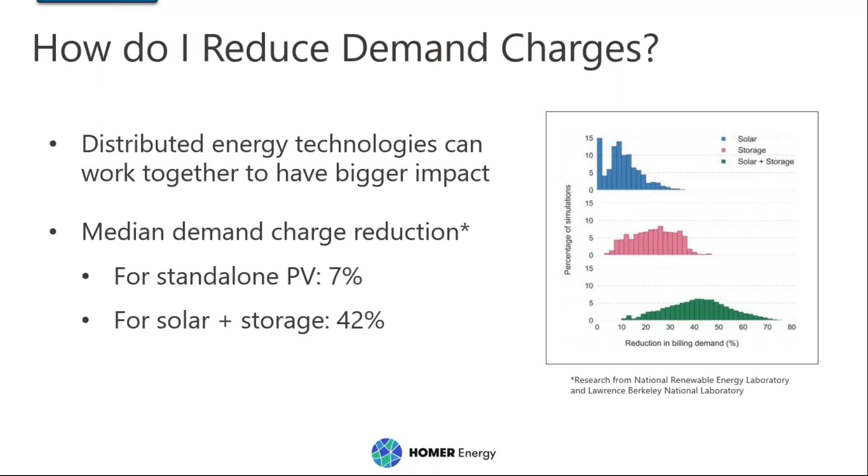Given that you need a mix of technologies to reliably reduce your utility bill, HOMER Grid will help you design this hybrid system, and that design process can be pretty complex. HOMER Grid will help you quickly evaluate any potential projects you're considering, and it's meant to facilitate this process and allow you to quickly model your utility bill and the hybrid system.

Each project is unique. The customer type and the load shape are critical to consider in this feasibility analysis. You're constantly considering the trade-offs and ultimately trying to answer questions like, how do you get the most out of your investment?

So we're bringing in HOMER Grid now. HOMER Grid is for modeling hybrid behind-the-meter systems where a reliable electricity network is connected. The software can quickly and accurately suggest the best size and technologies to reduce your utility bill through demand charge reduction, energy arbitrage, or PV arbitrage and self-consumption.

Using the philosophy that guides all of HOMER Energy's products, HOMER Grid determines the best mix of technologies and size to achieve the lowest cost solution. The technologies that HOMER Grid evaluates include solar PV, multiple chemistries for storage solutions, generators, and even combined heat and power technologies. HOMER Grid can help you understand the value and impact these technologies have in reducing your utility bill, and we try to make this process as easy and as quick as possible.

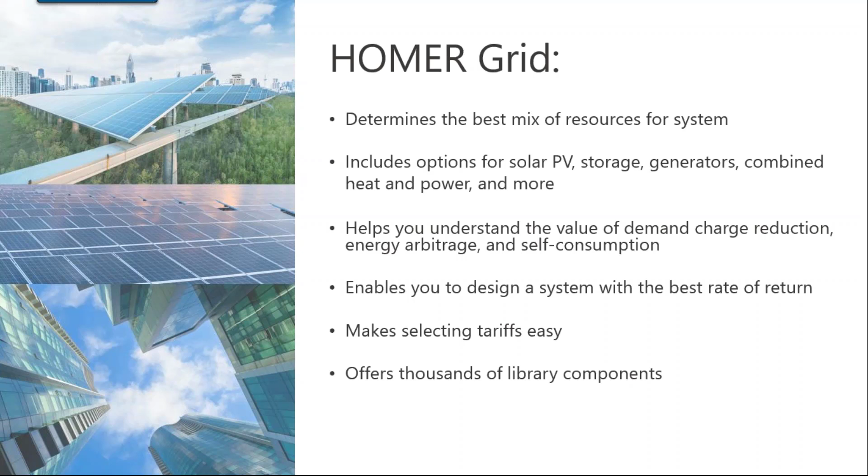If you want to compare utilities to one another, you can compare multiple tariffs. Likewise, you can compare specific components to each other and decide exactly which technology would have the lowest cost over the project lifetime. The library in HOMER Grid has thousands of components that can facilitate this exercise in evaluating trade-offs, so you can compare whether a lead acid battery would be cheaper than a lithium-ion battery.

How does all of this analysis happen? Well first, you have to start with your inputs, including where you're planning on building this project and what technologies you may be considering. Then you'll need to specify which tariff your facility is currently on and whether a different tariff might be possible, a reclassification as it's sometimes referred to.

If your project can utilize any incentives which would help the economics, you'll need to add that information. And of course, your facility's electrical needs, or the load profile, should be uploaded if at all possible. If you don't have your facility's load profile, we try to give you some starting point and examples. In the US, we've connected to the OpenEI database of load profiles, which you can use as a starting point. But of course, the more accurate your inputs, the better your results will be.

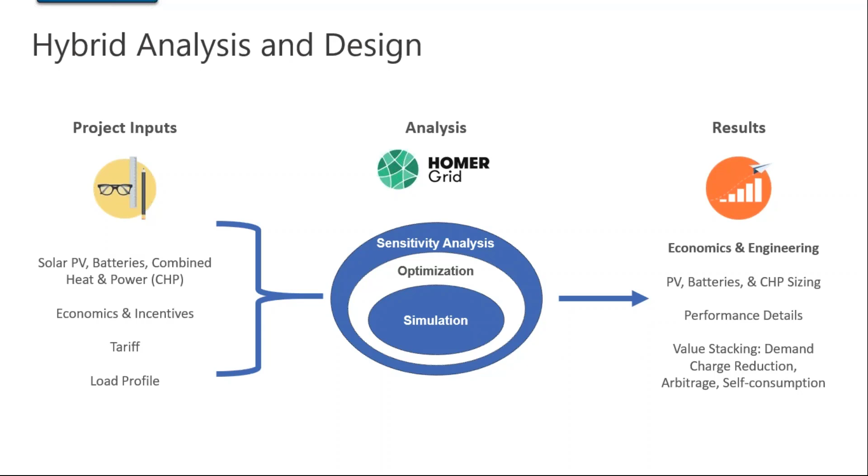HOMER Grid runs, depending on your inputs, hundreds to thousands of simulations and then ranks these simulations based on the lowest net present cost, and presents you ultimately with the economics and the engineering for your hybrid system. It sizes the system architecture, calculates performance details, and provides you with the financial information.

So I touched on many of the values that HOMER Grid has to offer, starting with demand charge reduction, the value stacking aspect of PV arbitrage and energy arbitrage. We pride ourselves in the robust storage model that HOMER Grid uses, which greatly outdoes the competition, and the powerful optimizer, which helps you find the right size for your hybrid technologies.

As far as the cutting edge dispatch strategy goes, our development team has come up with a perfect foresight methodology to make dispatch decisions, and I'll go through that in more detail during our demo. We're trying to facilitate this exercise and make it quick and easy for you, and to help you, we offer global resource data and integrate with the tariff database. Ultimately, the value of HOMER Grid is to get detailed, accurate, and completely customizable results where you can explore and quantify various risks associated with building your project.

And now I will jump into a HOMER Grid demo. Let's see. I'm going to talk about an example of an office building in downtown Sydney, which has both an electric load and a thermal load.

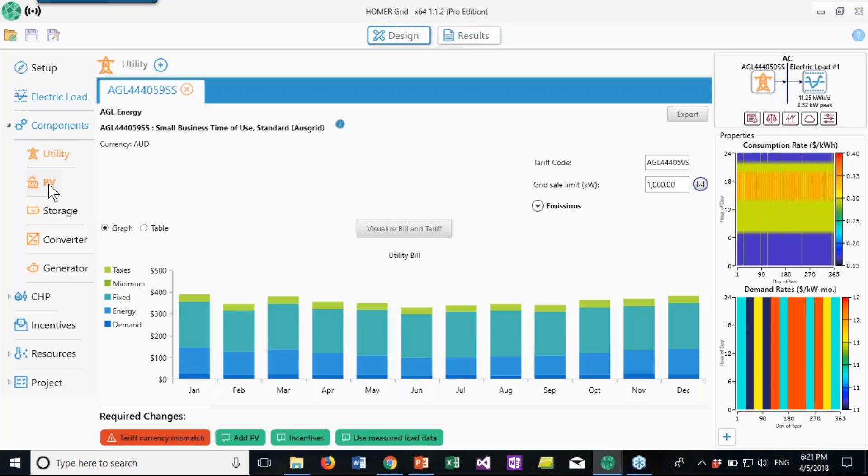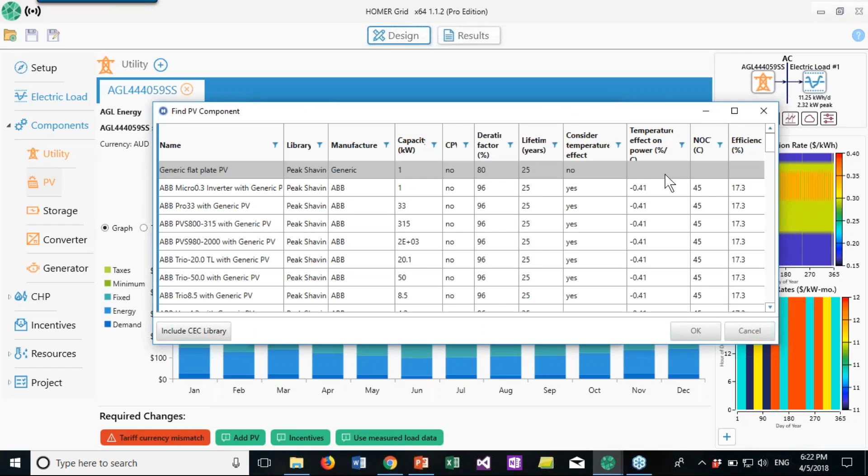We'll do PV. There's two ways to choose your PV system: you can choose from this drop-down menu here, or you can choose from this complete catalog menu, which has thousands of different PV modules. Today we're going to do just the generic flat plate PV.

And you'll notice that I'm faced with a lot of numbers here. If you don't know what they are, that's okay.

HOMER Grid and HOMER Pro, for that matter, are both economic models, and therefore they can consider, if you want to, economies of scale. So it allows you to say that smaller size installations, say residential PV, has a price of approximately $3 a watt, and utility scale PV drops down to below $2 a watt. And so it allows you to make the trade-offs more easily.

If you just have a price for your PV system which you know, of course you can just have one line here and that'll be the price all the way across, without considering economies of scale. That's perfectly fine. In our case here, these numbers by default are in American dollars, so they'll be a little bit off for Australia.

If you ever get stuck, you can go down to these required changes here, and it will help you find your way essentially. So here I clicked on currency tariff currency mismatch, and I'll redefine the Australian dollars here.

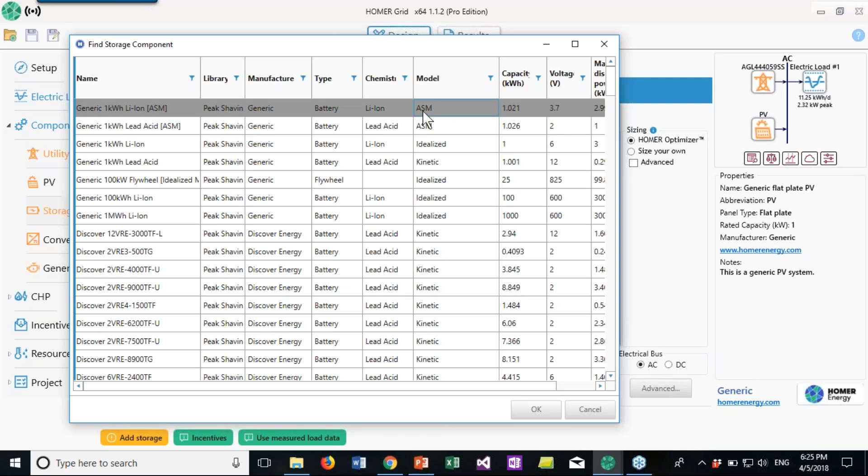And so I think we should take advantage of that sophistication and use the ASM battery in our model default.

Again, these numbers are to take into account economies of scale. Depending on which component you choose, there'll be different pricing information by default. Often if you're choosing a non-generic component, there won't be pricing listed because it's difficult to get manufacturers to give pricing - they'd like to be contacted about their components as opposed to sending out false pricing information. So often with manufacturer components, you'll have to define the pricing yourself, or the generic components can give you a good starting point.

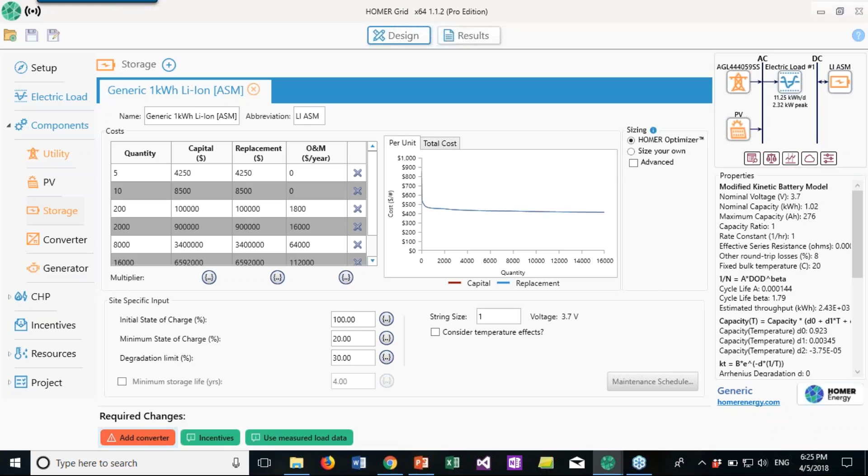And now we'll follow these red required changes here. We need to add a converter. So we did that here.

For all the components so far, we have been using this HOMER optimizer as our sizing tool, and we'll continue to do that. That allows it to find the right size for our system.

If we wanted to say, no, I have a PV array, I know that my PV array is 200 kilowatts, then you can enter that there. Or if you wanted to use the optimizer, but say the maximum size of my roof is actually, I can only hold a megawatt, you can add that as an upper limit to the HOMER optimizer.

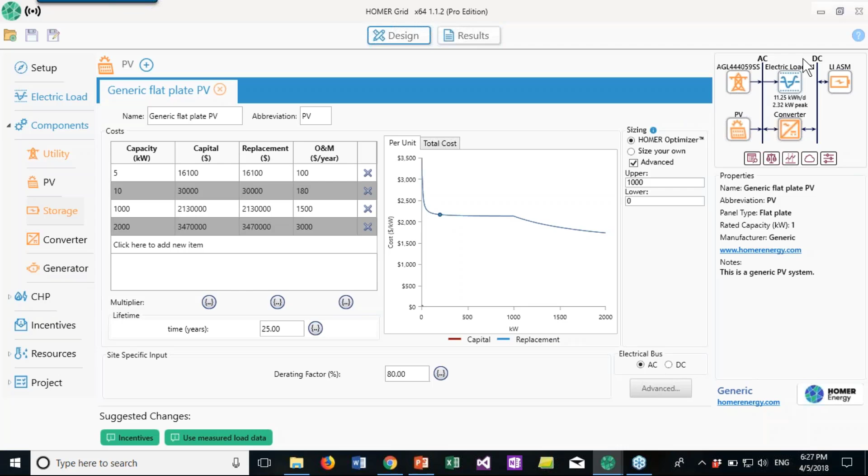Now that we have no more red required changes, we could just go to our results right now. But I wanted to quickly show you how to use our thermal capabilities and CHP. So this is a perfectly fine system, but we're going to add a thermal load to it.

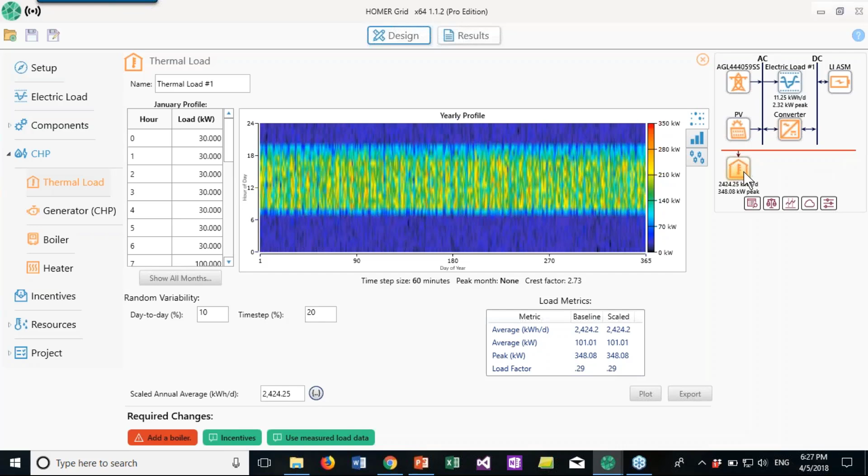And we have the same options. We can import it, we can use OpenEI, or we'll use this synthetic load profile for the commercial. And that popped up right here. So the different components that can serve a thermal load include the boiler.

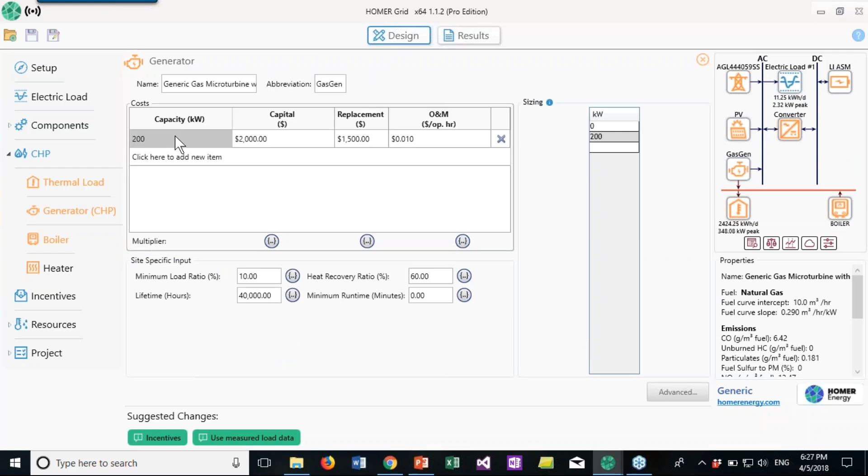And of course you can change the pricing here, or a generator with CHP technologies. And we'll do size your own. And of course, you should always enter your specific pricing if you have it. That's obviously the most accurate, and that'll give you the best results.

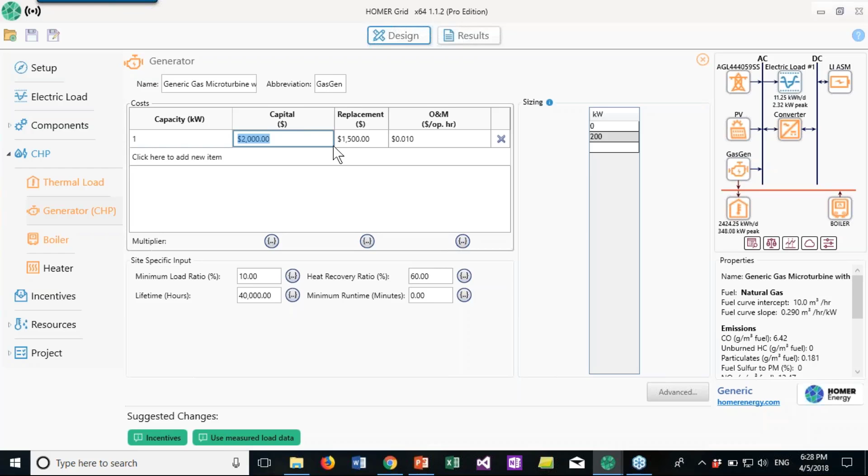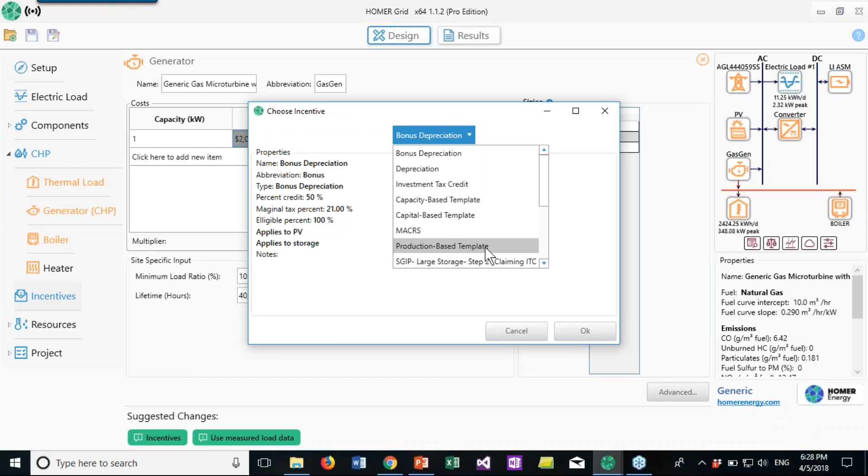And the final thing I'd like to show you as far as the design side goes are these incentives, and that can really affect your economics, so it ends up being important. We have some incentives built into the software, like the US ITC, US MACRS, and we have several templates that you can use to create your own incentive.

So if we were trying to model an LREC, for example, I think we would use a production-based incentive, and that would apply 8 cents per kilowatt hour with, say, no maximum. And we could limit it to the first 10 years.

So given you can use any of the other templates, there's also a capacity-based template or capital-based template. You should be able to represent your state and local incentives that way. And let us know if we need to build anything out as far as the incentives go.

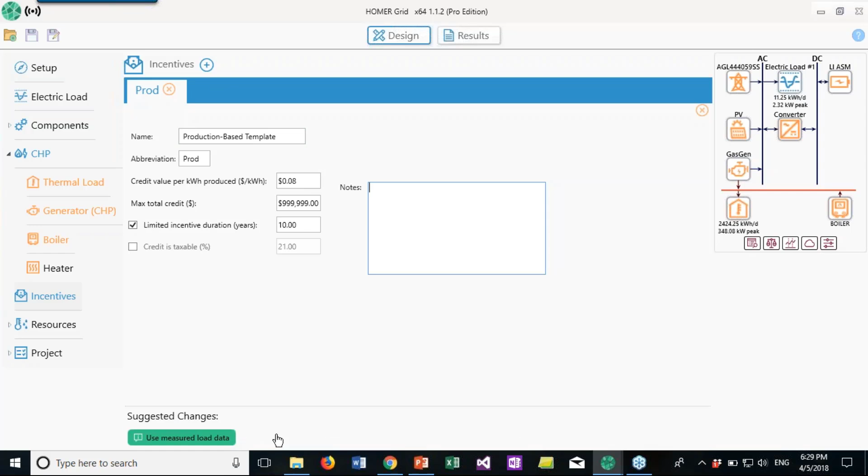So again, we have no more red required changes, and we can go to our results. So now it's calculating, and each optimization actually takes a couple seconds to up to a minute. So the calculation in total can be approximately between 5 and 30 minutes.

And the reason it's taking relatively long is because it's making decisions for each time step in the simulation. And if you're running your model with 15-minute time steps, the results will definitely be more accurate if you have a 15-minute demand charge. But the calculation will take longer.

Similarly, if you're running with sensitivity analyses, which we didn't actually show in this example, that also will compound your runtime. But it's because it's making decisions for every time step in a very robust and thorough way. We are working on the performance of it, which should be ready by our next larger release in June. So since we don't want to wait 5 to 30 minutes, I've already calculated this file.

Once HOMER Grid finishes calculating, you'll see this results table. It's a summary of different system configurations and combinations, showing for each configuration what's the right size for each of the components. It's ranked from top to bottom by net present cost,

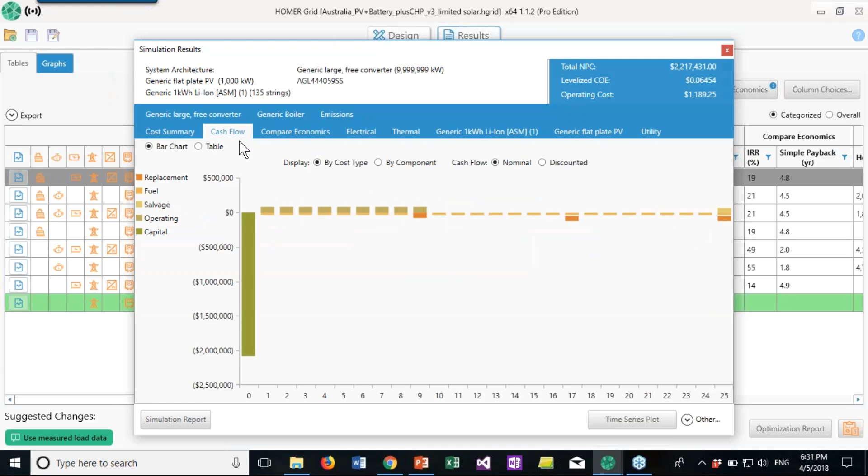This cost summary table will allow you to see and check that your incentives are being accurately represented, and your capital and O&M costs are being accurately represented in the model. We have a cash flow tab and the compare economics tab.

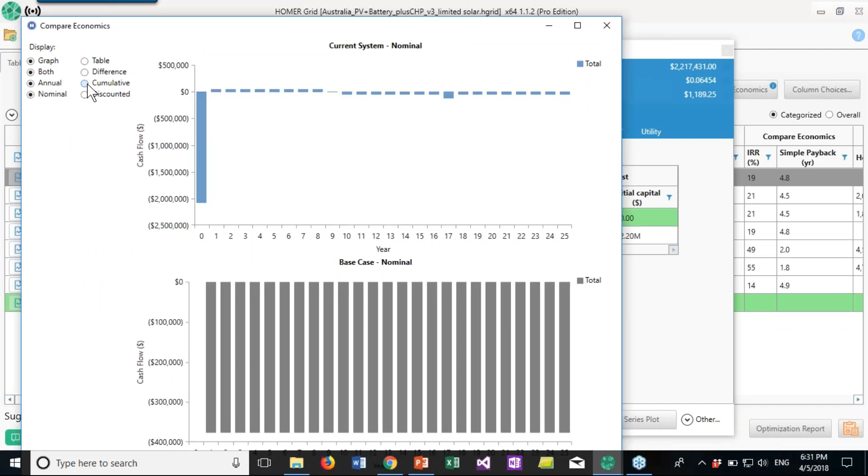And I think one of the more powerful things here is a graphic that really explains what the payback time means. So your current system is your hybrid system, and your base case is that utility-only system. Where those lines cross is the payback time.

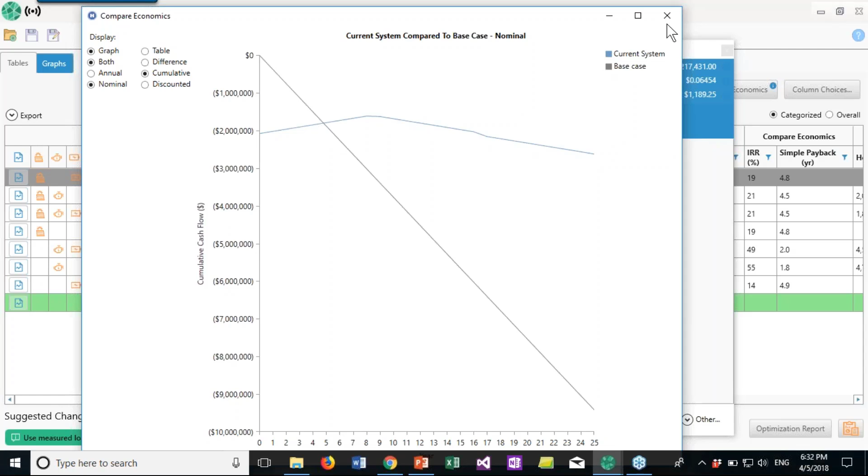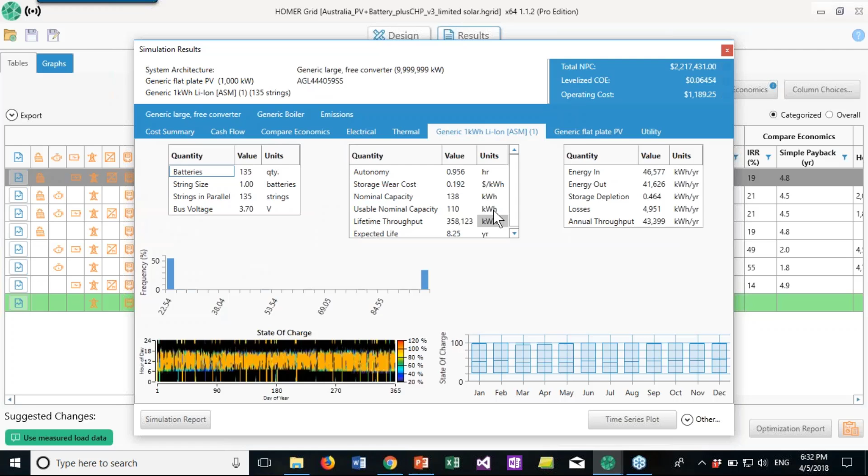So for each of the components in our system, we can look at a tab and see when is the battery operating, when is the PV producing. And one thing that's really helpful is to see a breakdown of this value stacking that we were talking about. Here is the reduction in energy charges, and here is the reduction in demand charges.

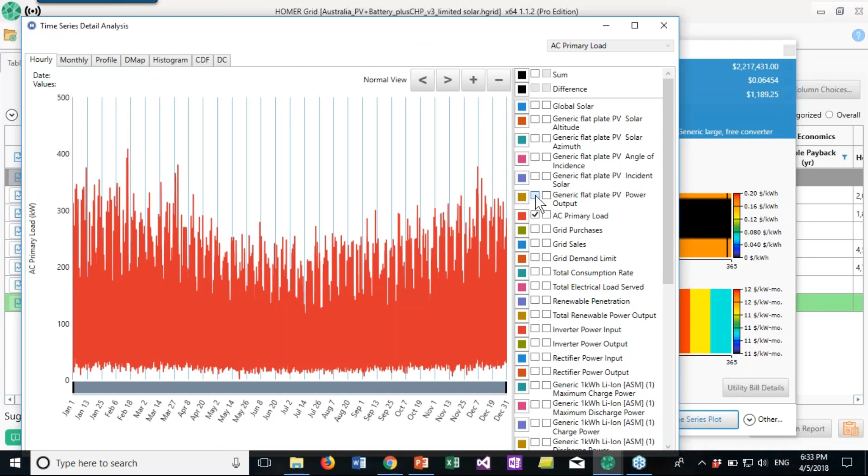So $22,000 are being reduced from the demand charges, and it seems like a lot of savings are coming from having that PV. If you wanted to see a time series plot, which would show how much the PV is producing, it's generally an oversized system. And after we've installed our hybrid system, what are the grid purchases?

So I'll do a before and after like we had before. Red is before, green is after, and the green always has to stay below this imaginary demand limit. The power of HOMER Grid is that it finds this demand limit for each month or for each time of use rate, if necessary, and tries to find the right balance between installing extra batteries and paying that demand charge.

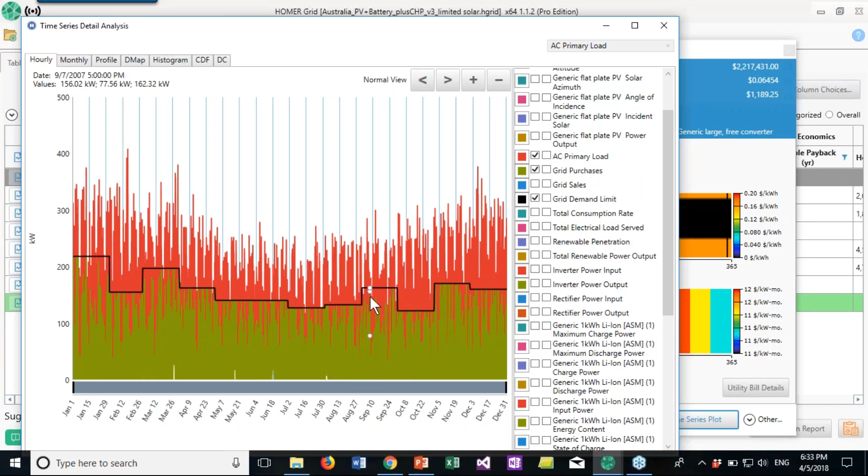So this is your view into what the dispatch is doing. You can make sure that it's operating as you'd expect it to, that the battery is engaging during on-peak times. All of that you can see through this time series.

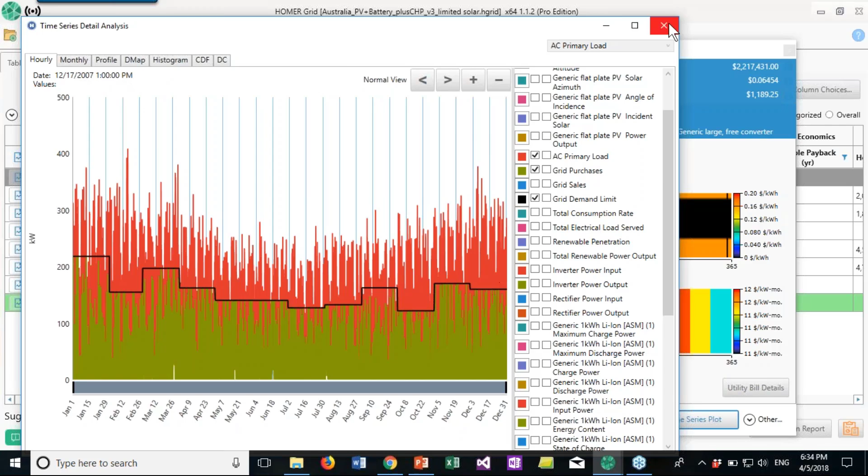I think the last things I'd like to show you are our reporting capabilities. If you are certain that this is the system you would like to create a report about, you can use this simulation report here. It will give you essentially all the information in these tabs, and it will allow you to bring over specific views from the time series plot into your report. So you can create a report about this certain system.

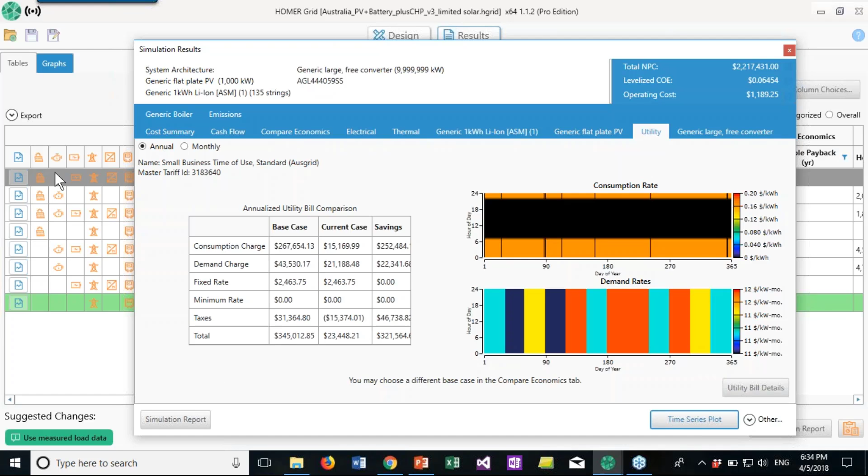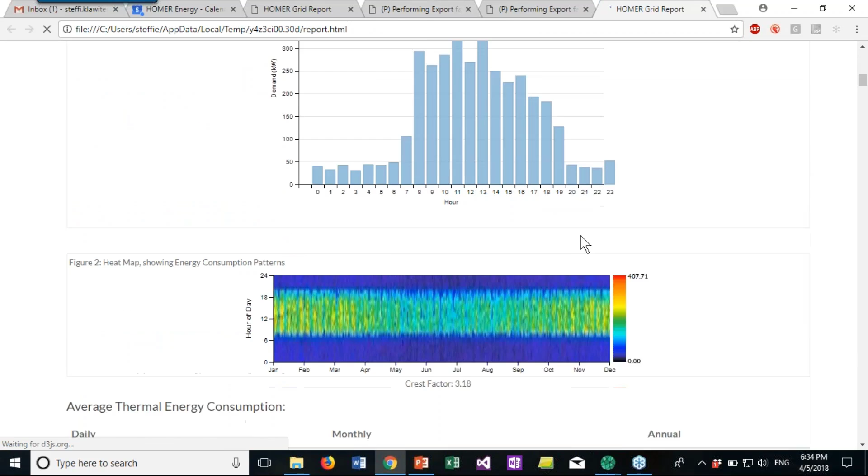If you would rather have a report about, say, the top 5 systems here, you can use this optimization report button. It'll give you information over those top 5 winning system architecture types, including information on the site, when does the peak load happen, and what are the savings on the utility bill.

All right, I think that concludes the demo. I'll turn it back over to Leanne, and she can explain how to get started.

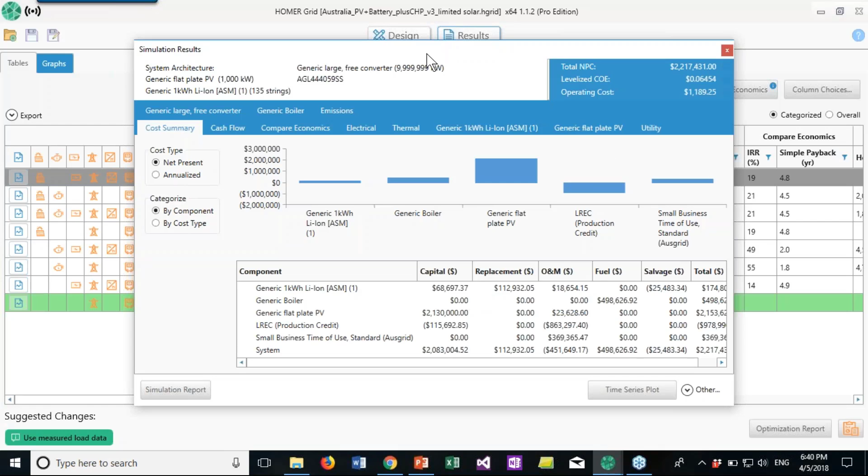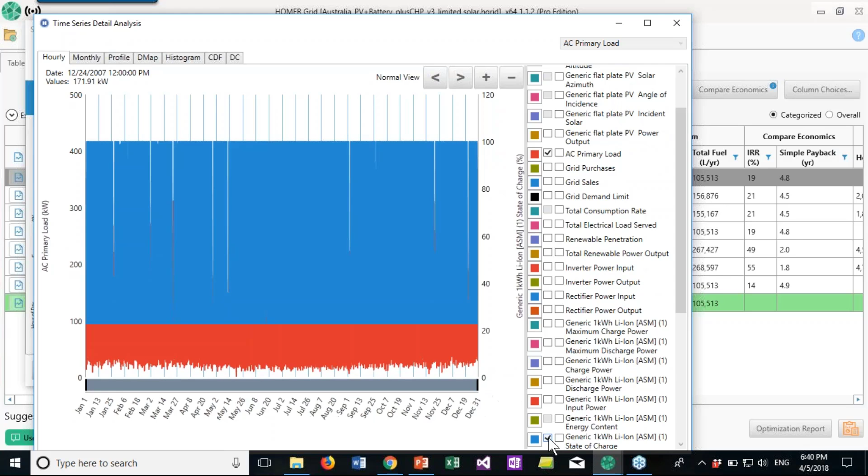Let's go back to the software. You can see here it's sized 136 or 135 kilowatt hours of batteries. Here's the information about the battery, including quantity, storage wear cost per kilowatt hour, lifetime throughput, and metrics on how much energy it supplies and how much energy goes out. Those metrics you can see in the time series plot, showing when it's discharging. We have this state of charge line here, so you can make sure the dispatch is making the correct decisions you'd like to see. You can see when it's discharging and when it's recharging, generally charging during the day and discharging in the evening. That's probably what you'd expect.

Is demand charge reduction based on a perfect monthly forecast? The dispatch strategy uses what we call perfect foresight, meaning it looks ahead 48 hours and knows the solar resource available, the electric load required, and the price of electricity or tariff structure for that period. It looks ahead at those three things and makes decisions accordingly. We've talked to some controller companies, and this seems, though optimistic, in the realm of reality, given the machine learning happening with electric load prediction and the forecasting capabilities for solar. So this is a best case, optimistic scenario, but not unreasonably so, in my opinion.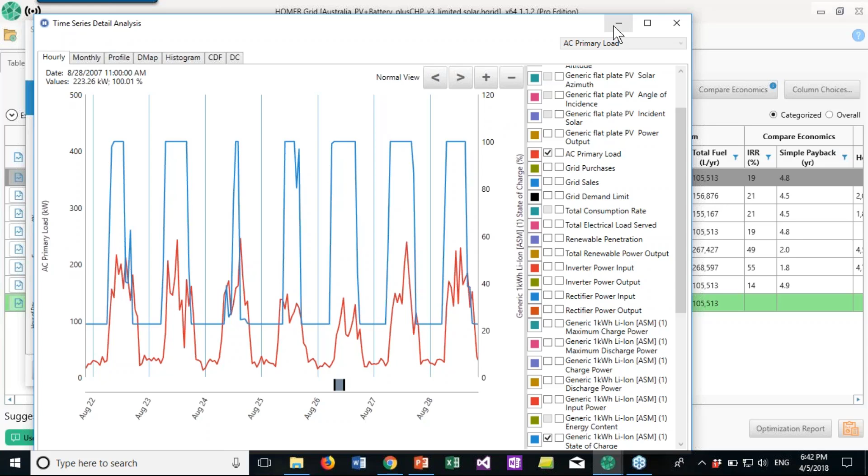Can Grid model solar and storage connected directly to the grid, not necessarily behind the meter? Right now, HOMER Grid is focused on behind-the-meter value streams, like demand charge reduction, energy arbitrage, and self-consumption—self-consumption is best modeled if you have an electric load. You can model essentially in-front-of-the-meter systems with HOMER Grid, but it's much more suited at this time for behind-the-meter value streams. But of course, the vision for Homer Grid is to become a full grid-connected product. Ultimately, based on customer feedback, we'll be thinking about how to add ancillary services or capacity market value streams into the product, though probably not before our planned June release.

Could you manually enter different tariff components for future years? What you can do in Homer Pro and Homer Grid is model two different tariffs, but you cannot specify that this year we'll have this tariff and next year have that tariff. We don't have multi-year functionality in Homer Grid yet.